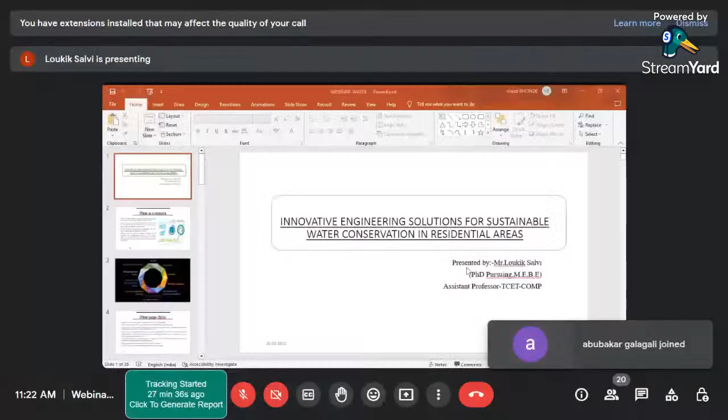The topic of our discussion today will be some innovative engineering solutions for sustainable water conservation in residential areas. Before we jump into the thick of matters, first we'll talk about water as a resource, and we'll see what is the utility of water as of now in the urban areas to start with, to fix the background of the subject before we move on to the solutions for water conservation.

Now, talking about water, these are some prerequisite but very fundamental facts. We know that water is a very important natural resource, and it is very essential for all our living on this earth.

Talking about its significance, 71% of the Earth's surface is covered by water, out of which only 3% is fresh water, which means at our disposal currently we have only 3% of the total water out of that 71% reserve, making water a very finite resource. The essentiality of water makes it a very significant resource, meaning the availability of water is going to be an issue in the long term.

Till now, as a country or as a globe, we have been subjected to a lot of issues related to water, which should be a big red flag for us to understand whether to use water judiciously or not. This means, in order to keep this ecosystem going, water plays a very crucial role in socio-economic factors and in maintaining biodiversity.

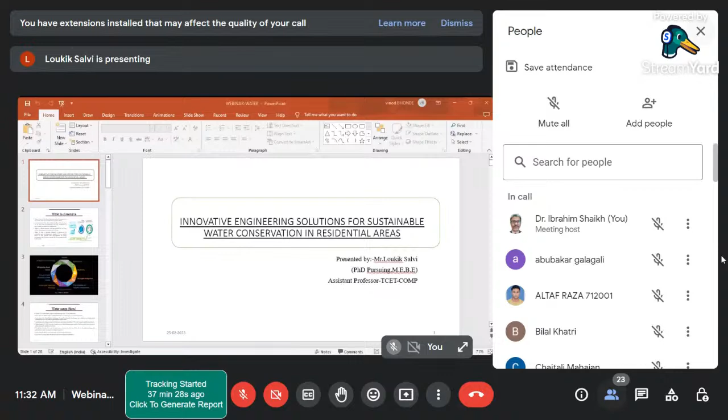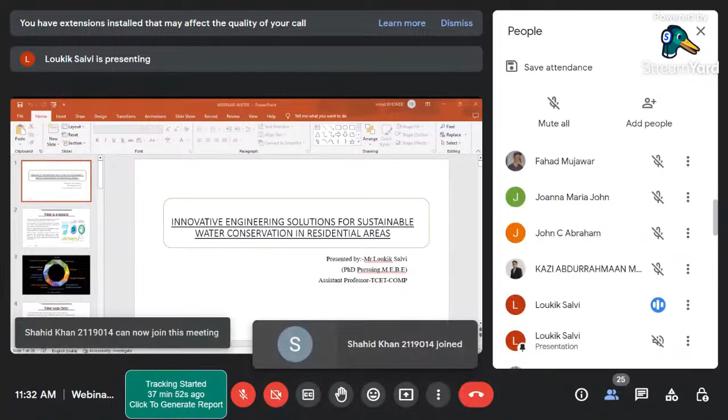Secondly, because of all these industrial activities, we can also consider deforestation as one of the major contributors here. The climate is changing. One study said that previously in Mumbai, in the state of Maharashtra, it was thought we got a lot of rainfall in the monsoon season, and only 1 to 2% of rainfall came from the non-monsoon period.

But if you look at the facts and statistics right now, we could all advocate that the amount of non-seasonal rainfall has increased, and the amount of rainfall in the monsoon period is decreasing. So the seasonality of rainfall, all in all, has changed, which is a big danger, because until now everything we had for water depended on rainfall. We knew for a fixed period of the year we'd get rainfall from natural sources, and we would rely on that seasonal rainfall throughout the year. But now the climate is changing.

With that, the population is not helping as well. So geography is changing, population is increasing, and we are surely going to be in a fix when it comes to thinking about sustainability as an issue for water.

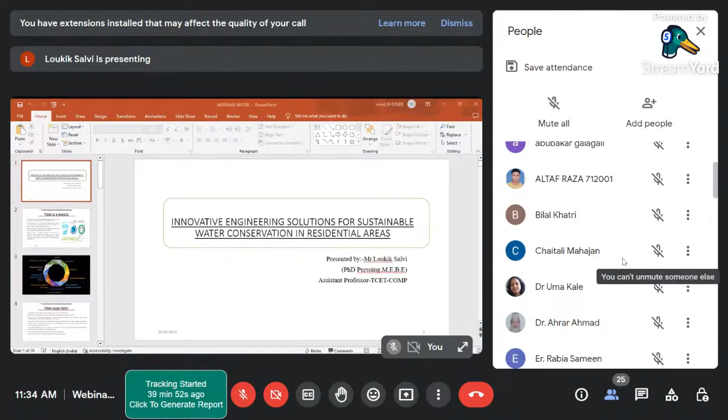If you talk about Mumbai city, per day there is 2,900 MLD of liquid discharge of water. So if tomorrow I have to keep Mumbai sustaining and running, I need this much water or liquid discharge, which is going to grow by 71% by the year 2041 because the population is going to increase. But mind you, population is not the only major player here.

The climate is changing, technological aspects have increased, the population has increased, but with that the climate is deteriorating as well, and that could reach 3,750 million liters per day to keep Mumbai running.

Now the question is that the amount of water we are getting from rainfall is decreasing, while the amount of water we need, the demand, is increasing. So there's going to be a huge dip in supply, but a huge inflationary increase in demand.

Now where is this demand coming from? This demand is basically coming from all the technologies that we have leveraged in residential areas, like bathing, washing clothes, drinking, cooking, or sanitary habits, cleaning the house, or washing utensils, which we consider basic aids and basic necessities of every household.

But the way the water is being used has to be talked about, because we know that we can never get over these activities: bathing, washing clothes, drinking, cooking. We can never get over these activities.

We surely need to talk about optimization in a way that we still keep doing these activities, but in a better way, to ensure that the water we have at our disposal does not increase exponentially, but we are able to suffice with the amount of water that has been disposed of during the rainy season or throughout the year.

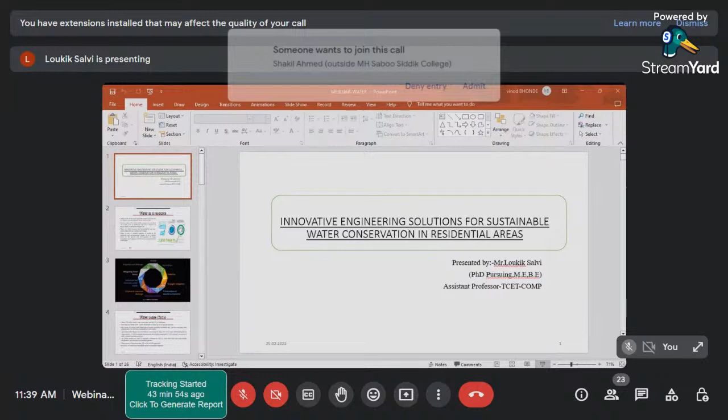Now when we talk about sustainable water conservation, as we said, we just need to change our habits. The population is going to grow. The amount of water we get in a year, we don't have direct control over it. The problem is we have no control over natural resources, and moreover we have no direct control over the population either.

Can we change the entire water management system in such a way that people become knowledgeable enough, and try to appreciate the sustainability of water, then move towards water conservation? We have been talking about water conservation through a lot of activities and programs, but we have never talked about the reason behind water conservation.

It is not that the population is growing, so we need to conserve water. It is not because the amount of water we'll be getting at our disposal from natural resources is going down. These are not the only sole contributors to water conservation, but we need to ensure that everything we need would be increasing exponentially. As a civilization, we are going to grow, so we need to incorporate sustainability somewhere.

We need to incorporate recycling somewhere. We need to incorporate protection and restoration of water somewhere. We need to adopt some practices, some technologies which are not going to hinder our progress, but which are going to help us increase the amount or the utility of the water, all in all.

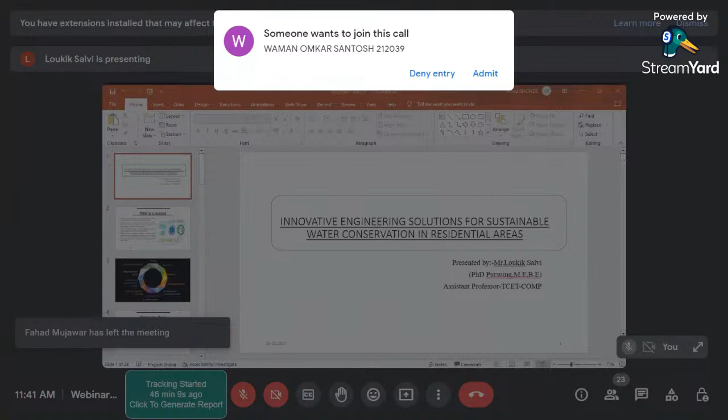When we discuss some techniques, we have been talking about conservation of water for a while now. But now we need to talk about how to sustainably conserve water. So I've listed down 6 techniques, and in the end, I'll be discussing one of the research projects going on regarding water usage patterns. Now, to start with, I'll just enlist the techniques used to sustainably conserve water.

First is obviously the rainwater harvesting system. Next is grey water recycling. Next is low flow plumbing, and the fourth would be smart irrigation, permeable paving, and xeriscaping. Now, in this, I have taken into consideration all the innovative engineering solutions which could be leveraged for rural, urban, or any house with a garden or irrigational area around it. Every usage of water has been taken into consideration for this case.

Now firstly, talking about rainwater harvesting, we are pretty much primed to rainwater harvesting. So we know that the water we get from rainfall should be stored somewhere. But that is a very traditional approach, because we have now moved towards the pakka makans. We no longer live in a kacha makan, which was a traditional household found in rural areas.

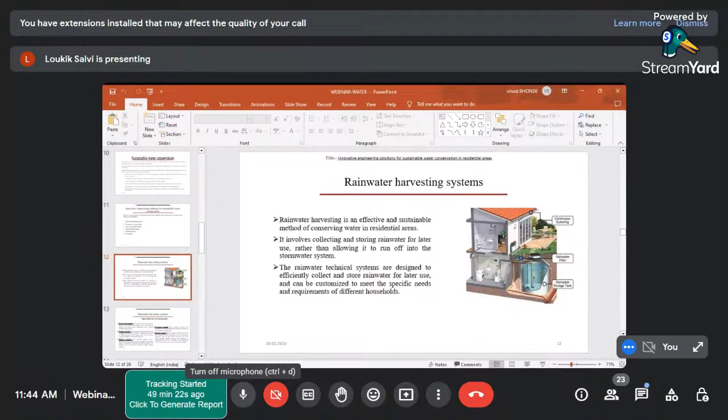Sir, can you see the slides now? We have changed the slide this way. Sir, zoom the presentation slide on the presentation view. Slideshow will do, F5. I was in slideshow, yeah, it was in slideshow. Okay, F5, I think.

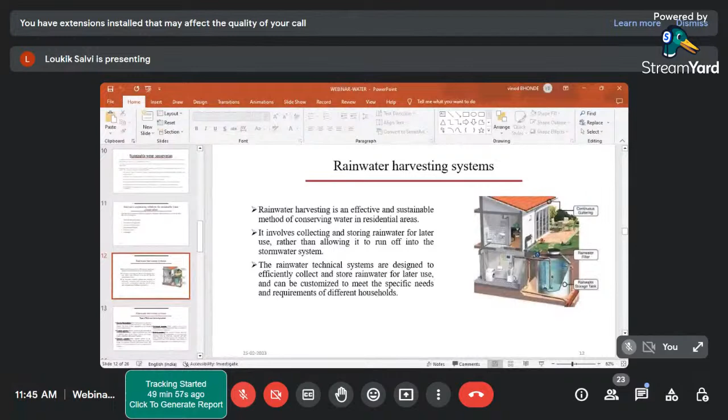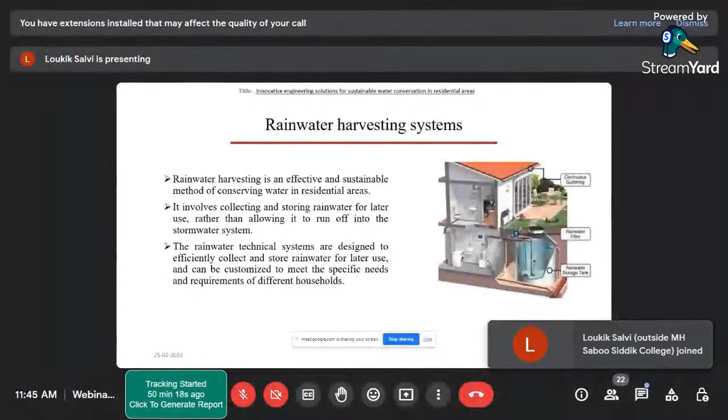Now this is in the slideshow. I hope it is visible, sir. No, it's visible but it should be in the slideshow presentation mode. Okay, let me try again. Is it now, sir? Yeah, correct. Yes, okay, thank you so much.

Talking about rainwater harvesting, we mentioned that we are living in a very complex area right now, and there are a lot of takers for the water on the other end.

Building a small or traditional rainwater harvesting system, or a traditional tank which is going to collect all the water from the rainfall, is going to be a difficult solution, because the demand here is very high, and the supply has to justify the demand.

Now, how do we justify the demand for a case where we know these pipes are perennial, and they're going to have water throughout the year from the BMC or from other sources that have been supplying water to us?

But if we happen to fix that rainwater harvesting system somewhere, we would be self-reliant, and we would not be dependent on the amount of water supplied from the municipal corporation. I'm talking about the inbuilt rainwater harvesting system in a society or a complex.

So we would be saving on the amount of water that is being used. Because we feel we have an unlimited supply of water from the BMC, we are more prone to using water in an unjudicious manner.

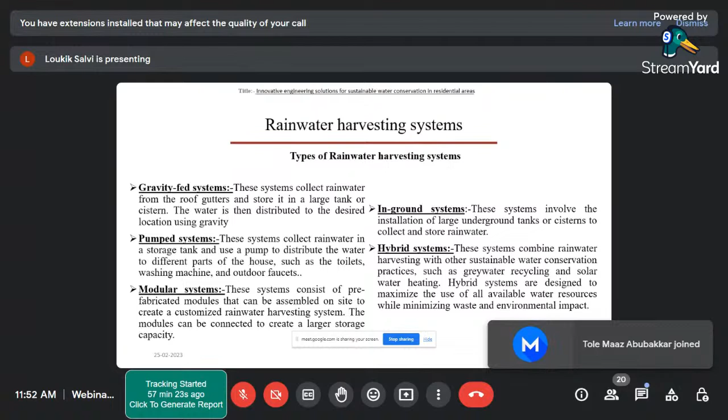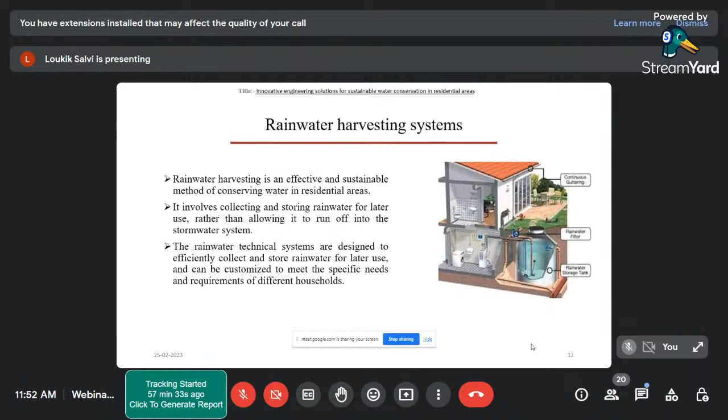Once we have the water in our house and it is used, it could then be treated, because that used water is generally treated as grey water, and that grey water could be recycled using some techniques, and then fed into the tanks again. This creates an entire system which is visible in this slide on the right hand side. So we are trying to use and reuse the water in a monitored and analytical way using a hybrid system.

Now, as we mentioned about grey water recycling, it's another technique that has come up as a boon for recycling water. Because if you look at the previous statistics that we had in the first or second slide, we mentioned that in urban areas there's always a big gap, or a big overuse of water in the kitchen or in the sanitary areas.

So the intrinsic thought is that the water used in kitchens, or in our washrooms or toilets, this grey water is of no use to us, and we need to dispose of it. But when we talk about recycling the water, since 50 to 70% of water is used in our kitchens and washrooms, what if we can recycle that 50 to 70%? It's going to increase the use and storage of water by 50 to 70%. Now, when we talk about the grey water system, there are many grey water systems that we can use.

First, we start with the basic grey water system. It is just diverting the grey water from the kitchen or from the washrooms to a storage tank or barrel, store it there, and treat it properly.

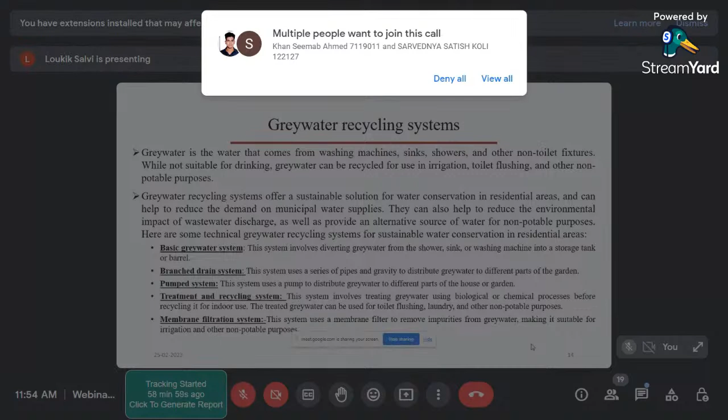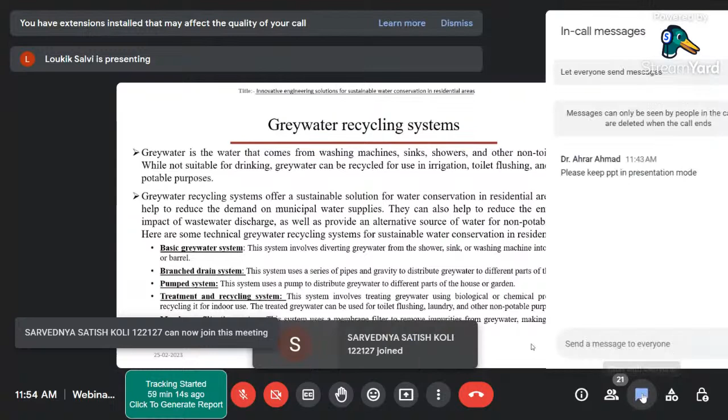Branched would be throughout the house, because we live in the pipeline system, which means that each and every pipe that has been provided to the kitchen, or any other room in the house, the grey water from each unit is cumulatively collected and stored in a certain area.

Now, if we take the example of some grey water which is not significantly contaminated, something that could be used for washing our hands, or is not a big contamination source for the water, it could be reused in some part of the garden, could be reused for some car washing centers, or for washing the car parked in our own parking.

Next is the pumped system, in which we can use a pump to distribute the grey water to different parts of the house. The entire idea here is to primarily talk about those recycling techniques which take no significant economic cost.

That is, using the least grey water, that is not so significantly contaminated, could be used for washing a car, as mentioned, or for gardening, or for watering some household plants. So that would serve the purpose, and the water would not be wasted.

Next is talking about that part of the grey water which has been contaminated to such a level that it cannot be directly reused. I'm talking about something that comes from toilet flushes or laundries, or some non-potable sources of water from which grey water has been found. That has to be fed into a treatment plant, and it has to be recycled.

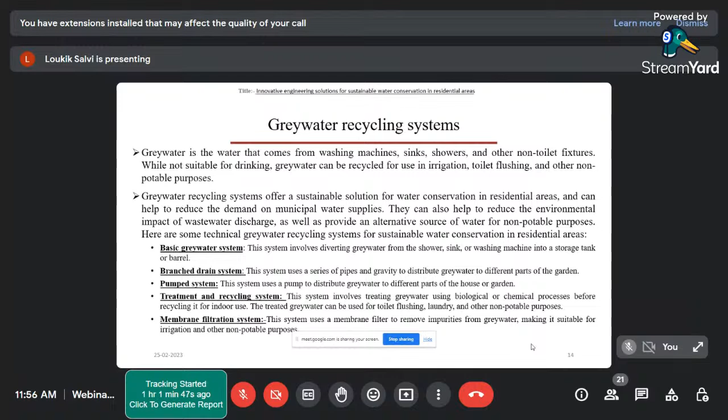But what if we can fix this? Because a normal flush, as mentioned, is going to take a huge amount of water, 66,000 gallons per year of water. But if we use a low flush, which is a technique of using minimal water in our flushes, it is going to save up to 73% of water.

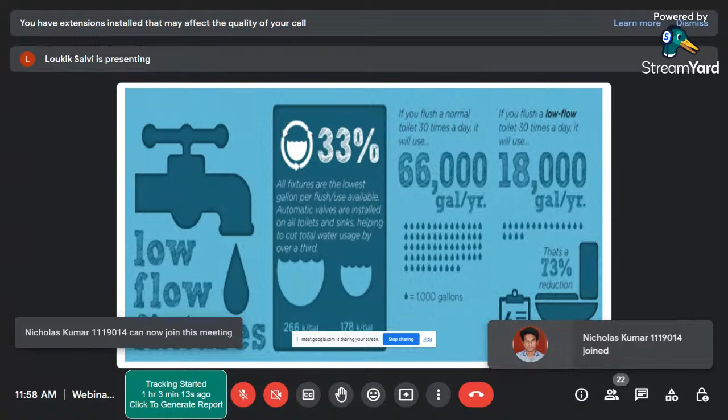Now, if I talk about this in a very technical aspect, the amount of water we are disposing of in our flushes, sinks, and washing machines is completely unmonitored. It has been standardized to such a level that every toilet, irrespective of its size or use, and every washing machine, irrespective of its type and use, gets a standard amount of water, which has been standardized by certain constructors or certain people using that particular system. But what if we standardize the entire plumbing system, or standardize the entire flow of the plumbing?

If we are able to fix the flow of the plumbing in a way that we decrease the number of flushes, decrease the time of the flushes, decrease the size of pipes serving water to these kinds of things, we would be able to save a lot of water and ensure we keep doing the same things at the same rate. And this is what sustainability is all about.

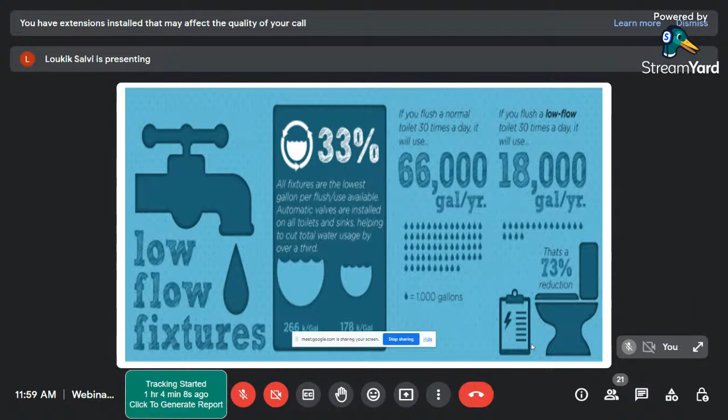It's not going to be an obstacle to our daily routine, but rather it's going to allow us to keep doing the same things at the same rate, but with less water. So low flow plumbing fixtures would help us decrease the entire water usage.

Now, what do we do to integrate low flow plumbing fixtures? First we need to study the entire water distribution system, or the mapping of the pipes at our home. From that, we know the taps or sources of water take the majority of water allocated to the house.

What if we substitute all of them with low flow pipes? What if we use these techniques instead of traditional toilet techniques? We are going to save water in gallons, and that too in a per day manner.

We can give up dishwashers and instead use traditional dishwashing techniques, which would sound like a big complexity or hurdle for households with a lot of people. But even today, dishwashers come with low flow plumbing, similar to the 5-star rating we find on electric appliances these days.

So whenever we go to a shop and ask for plumbing techniques or fixtures, we should ask for low flow plumbing, which quite literally is going to reduce the usage or outsource of water by 30 to 40%.

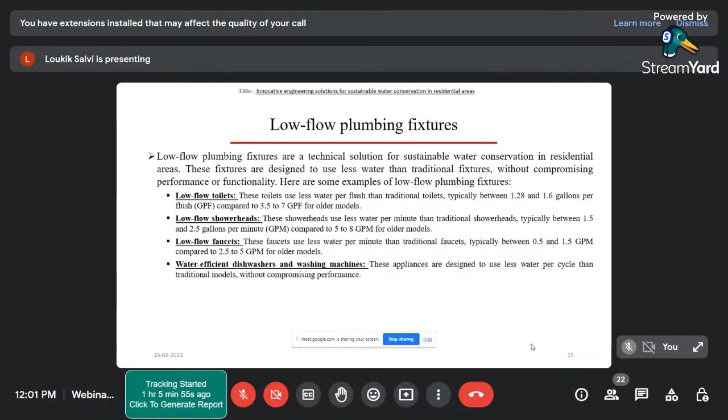Next is a smart irrigation system. This is discussed a lot because after the advent of IoT, we know that everywhere we can set up a sensor, and that sensor could be controlled using a microcontroller as well. Now, why set up the sensor?

A basic requirement of water first has to be studied, because we are very emotional about the environment and the trees we plant around, which is why we uncyclically or unproportionately water them, without studying the need. We just keep supplying water to our plants.

Which is why if we could have sensors that tell us how much water is needed for the plant, or how much is enough for a certain irrigated area, it would help us optimize and finally reduce water usage. So if we can set up some controlling parameter, as we said for urban areas, we'll be talking about it in a while.

But if we just control the entire irrigation area—why talk about a smart irrigation system for cities? Because we have gardens around, and those could fall under the irrigated area. So we need to water them.

Instead of watering them with pipes habitually, we could have irrigation techniques to cut down on water. If we can tech enable them with soil moisture sensors, weather based controllers, water flow sensors, mobile apps, or zone based watering, we can monitor the demand for water and supply accordingly, whether manual or automated.

Now automated irrigation means, if we know how much demand for water there is, we would supply that much amount, which could be done again with the help of IoT and sensors or a microcontroller. That is something easily done or applicable to these kinds of systems.

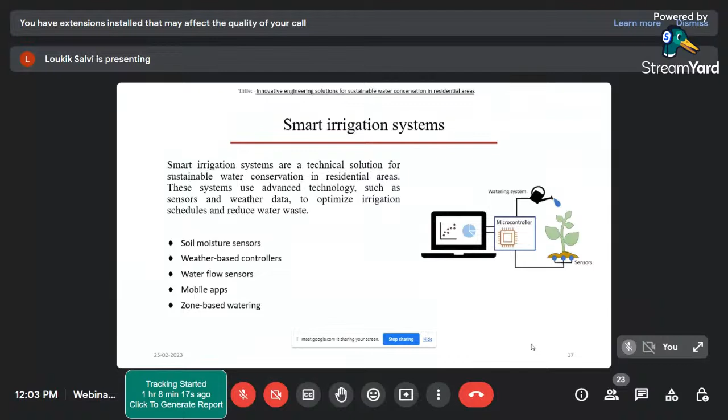Instead of having blocks or simple concrete at our societies or around the areas that we live in, we could have permeable pavers, which help water seep through it, because now we want a sustainable conservation of water, meaning every drop saved is very important. These permeable pavers help seep the water in, and that water could be reused again, which sets up the relationship with gray water saving as well, because all this water collected through the permeable pavers would be gray water.

Depending upon our understanding, the usage of water further on, or the treatment of this gray water, we could reuse this water in some way. If we talk about advances in gray water recycling, we can treat all types of gray water to such an intensity that it becomes potable again. This is something seen in many upcoming projects in the last decade or so, and it has been taken into consideration by all the builders and construction people as well.

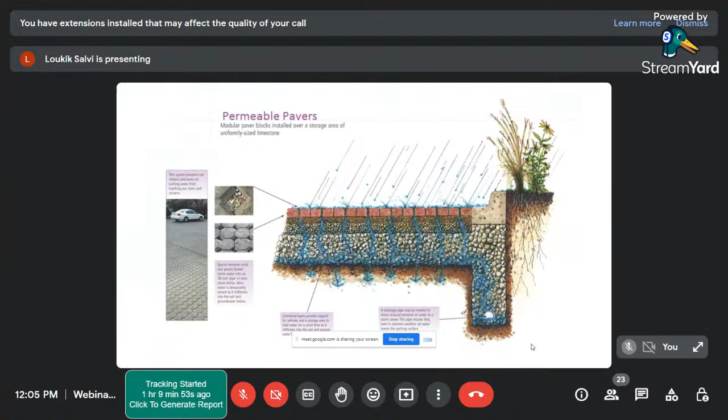Next is xeriscaping. Xeriscaping in a way is adding more and more landscape around us. Now this is obviously not a technical aspect, but it has now been added to the innovative measures for saving water. How? Because we as humans have always had this habit of having small plants around, and those plants are obviously going to save a lot of water for us.

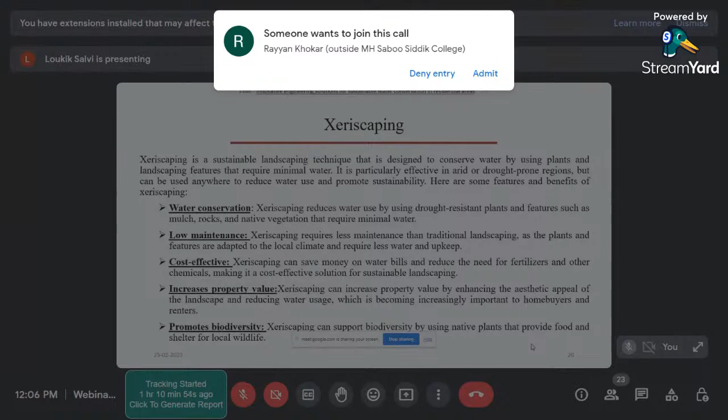What if we convert the entire place that we live in, as in the society or community, into a green landscape, but obviously a synthetic one? What happens then is, if we plant more trees around the place we live in, the water seeping capability of that entire place is going to increase, which is going to increase the amount of groundwater as well. This landscaping just involves having small plants or incorporating the permeable pavers we just talked about, and if we do that, we are ensuring biodiversity is taken care of.

We are ensuring that we're promoting more and more reuse of water, and the fact that we are reusing water is going to increase. For a fact, the maintenance of xeriscape is very less. This is a very booming thing out in the West, and it is coming somehow into our country as well from the West. It is cost effective, and the upside is that it increases property value as well. So we want to convert the areas we live in into a xeriscape, a synthetic landscape which has some small plants, herbs and shrubs around us, which will stop the water from flowing out of our community or society.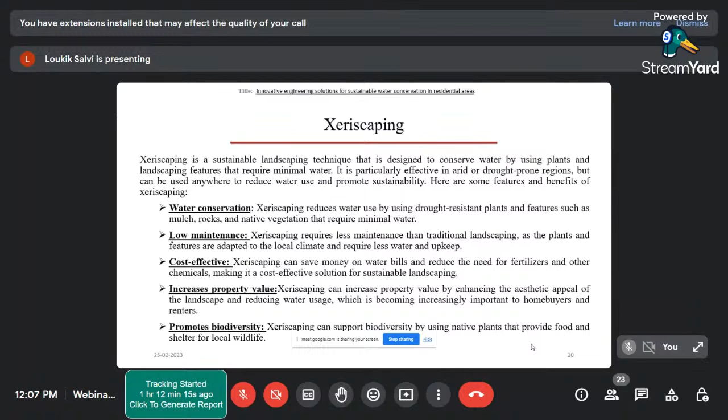It can be seeped into the rain harvested tank that we mentioned in the first place. If it becomes gray water, it could be treated and recycled. So this is how we have just completed one big cycle, in which we talked about rainwater harvesting, then the pavers, and then now the xeriscape. Everything we've discussed till now is somehow related to each other, and this is quite significant when we talk about it from the view of urban areas.

Now, one thing we should take care of is the water demand function. Just to give you an idea about how important this is, let us talk about the traditional technique of calculating our bills. We live in a society which has, let's say, 100 people in it, and we get X amount of water. The amount of water used is considered as X divided by the total amount of people using it, and then we get a per unit bill for each person who falls under that 100-person category. Now, this is a very traditional way of calculating a bill.

It would be that some persons or families from those 100 families might have used more water than the other families, and we have just taken into consideration the number of members per family, which surely is not a good indicator when we talk about usage of water.

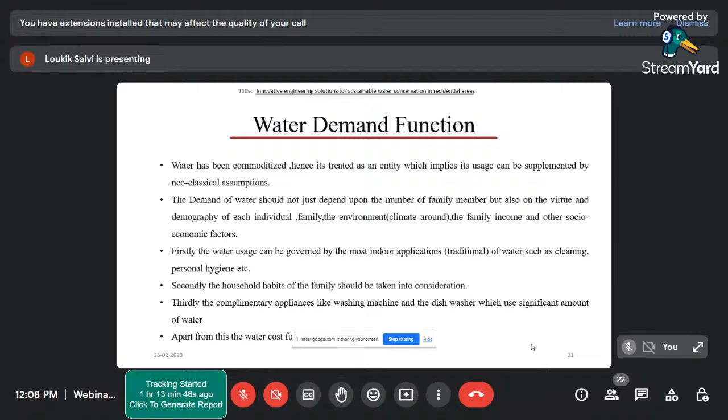For an outsider, it quite literally feels that the number of family members is directly proportional to the usage of water. As a family, I'm going to have some demand for water. I need to jot down a function with parameters that tell me, for a particular family, what factors are forcing that family to use water and then to overuse it. And what I'm talking about is this.

And that is surely not dependent on just one factor, the number of family members. It's dependent on water consumption, and that consumption could be further divided into n number of parameters, one of which is the water price. If we increase the water price, somehow we'll see some change in the usage of water.

Next is the type of household. As we said, we live in urban areas in a pakka household, which means we have the opportunity and convenience of setting up a lot of things in and around the house. So the household type is directly proportional to the use of water. If we're living in a pakka household, we might have more opportunities to abuse water.

And next is obviously the extrinsic factor, which could be climate, given that in summer we use more water than in winter. So this is how I propose we should devise a water function. If we can devise a water function for each area and relate it to the amount of water being supplied, we'll find there's a big gap that we've missed. The parameters affecting water consumption should be taken into consideration first.

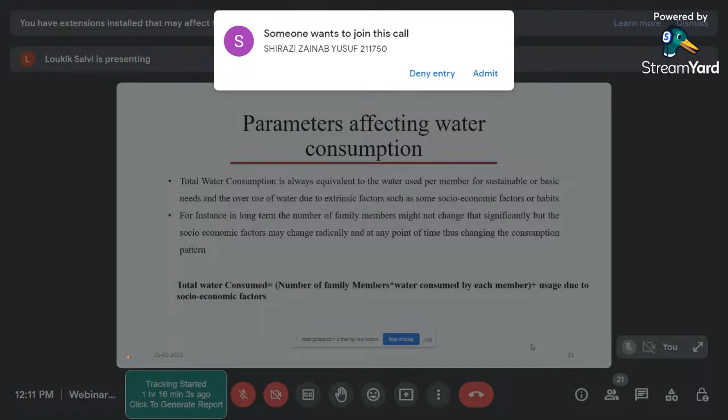We should not just say the total amount of water depends on the number of family members. In this case, number of family members multiplied by water consumed is the traditional approach. But we have to incorporate usage due to socio-economic factors, and usage due to festivals. We have to take into consideration the background of each family member, because that significantly affects water usage.

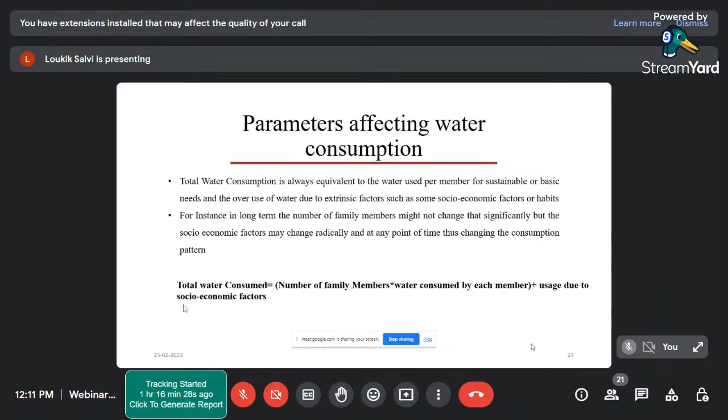If we talk about having more kids in the house, that's going to mean X amount of water usage. More old people in the house means Y amount of water usage. So the number of family members is not the only pointer the entire thing depends on; the reflecting factor would be consumption based on socio-economic factors, and the background of family members has to be taken into consideration. Only then can we radically talk about consumption.

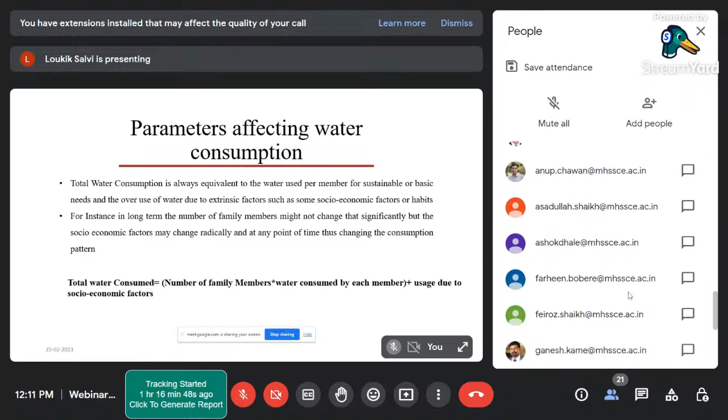So there's a big gap in the measurement of water consumption. Now this could be a proposed format. When we talk about usage of water, we use water and then measure it, which is why we fall behind in our countermeasures. Let's say I use X amount of water, and then I say out of X, there's one parameter X1 that shouldn't have been used, leading to overuse of water. But what if we can prefix those X1, X2 parameters leading to overuse, find the parameters useful for sustainable usage, and add them up to get the total water consumption.

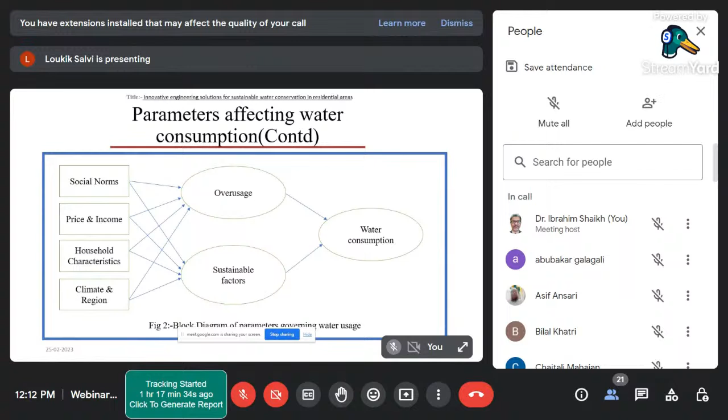So what I'm talking about is, if I consider social norms and the socio-economic background of that family, I can understand how much is overuse and how much is the proper sustainable factor, or whether it's a sustainable factor that leads to proper water consumption.

The price and income of the family and the price of the water being supplied to that area is going to affect the overuse and sustainability of water. The characteristics of the house, like square feet, bifurcation, type, area, and locality of the house define the overuse and sustainable usage of water parameter. And of course, geographical factors like climate and region are also clear indicators.

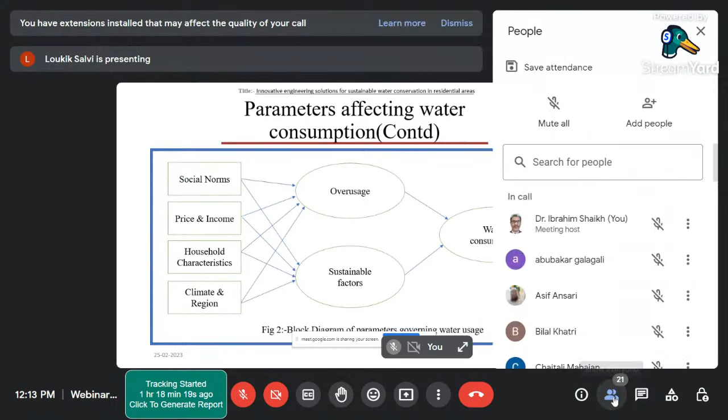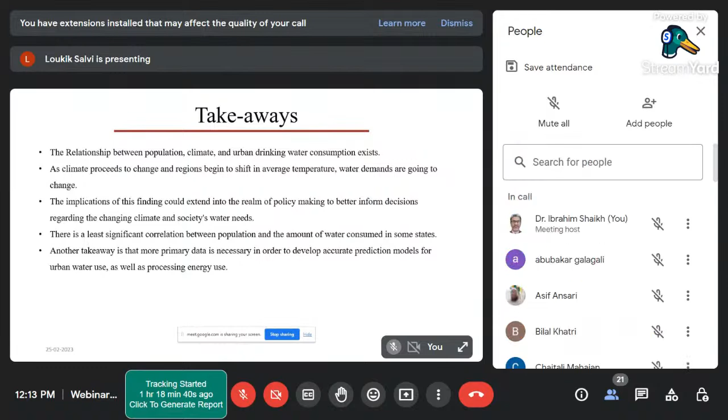The key takeaway is that when we talk about sustainably conserving water, we always prefix ourselves to conserving water, thinking there is some source that has to be taken care of, some storage that has to be developed in order to conserve water. But it is not so.

We have to talk about how the water is being used, where it is being used, and after we understand how much water is being used, how can we recycle that water. We should not talk about bringing more sources or storage capabilities, but rather about the amount of water we are using today. Can we use some other technique? Can we improvise the techniques that are using water today to extend a new horizon, a new policy that cuts down the amount of water?

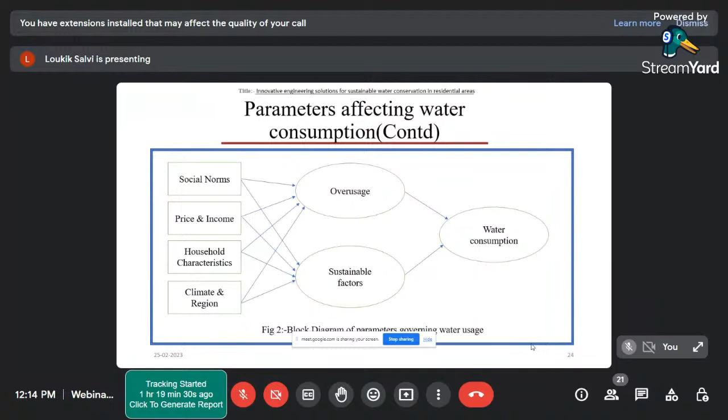The next thing is actually creating a proper overview or data out of this, and that data would have all these parameters. Through all these parameters, we can frame a hybrid water demand function. There is a big need for this because the population is increasing, the type of population has to be studied, and there are n number of other parameters like household, water price, or climate. So water usage is not dependent on just one parameter, but on n number of parameters, and we need to study all of them to form a water demand function and compare it to the supply of water that we have.

Only then can we say we'll be able to sustain with the amount of water, because the supply of water is going to go down while the demand is going to increase. Rather than looking at this scenario from outside and saying we need to be sustainable, can we go into the scenario and ask what is increasing the demand? It's not just population increase, but the type of household, water prices, or other extrinsic factors. If we could find factors that could be controlled, the demand could be curbed down, and if demand is brought in line with supply, we are moving towards sustainable water conservation.

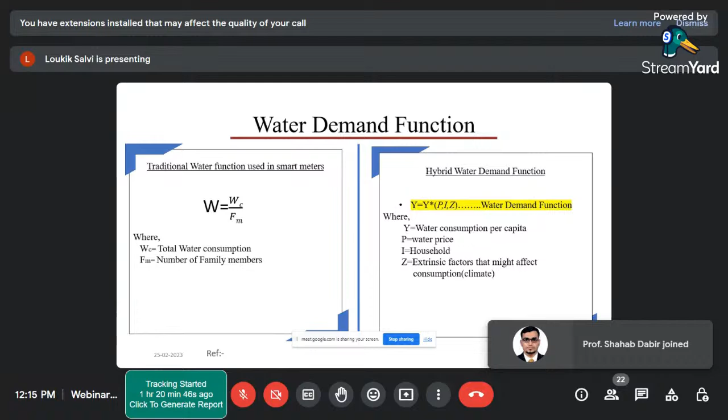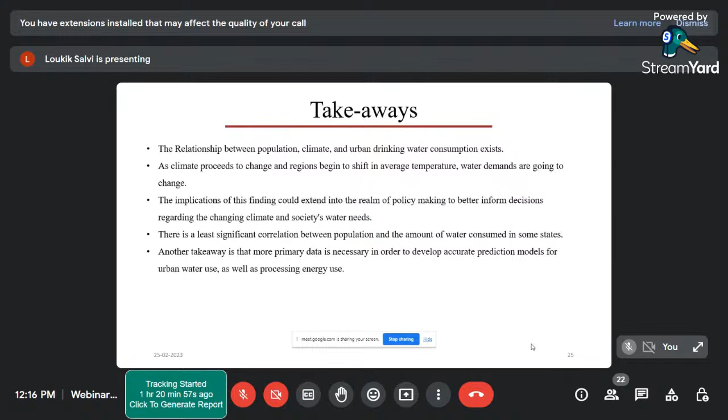So these are the takeaways from the slides we discussed, and this is how I feel is the way ahead. That is it from my side.